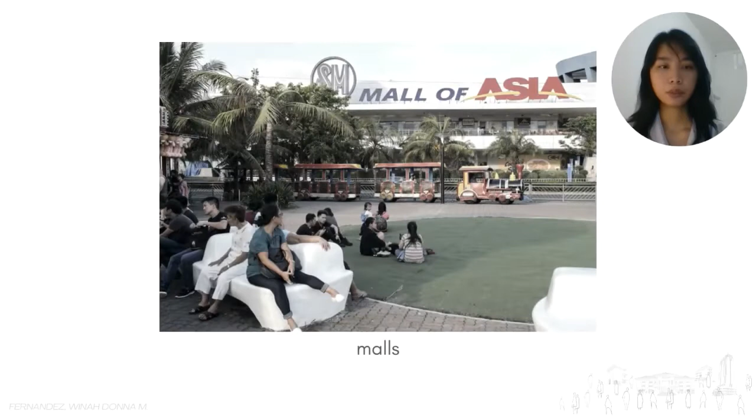However, in the present Philippines, various malls, which are all privately owned, have evolved into major gathering places, the new civic centers, which obscurely become what is public life, a place of interaction in air-conditioned containers of consumerism.

So what are civic centers? A civic center is a cluster of buildings and spaces, such as parks and government buildings, that offers necessary services to a city or municipality.

It provides the community a place for recreation and the government body a facility to effectively carry out its obligations in promoting the welfare of the community.

The proposal is to develop a civic center for the municipality, which would contain spaces for a learning center, public library, local government offices, community park, a co-working space, and a flexible exhibition and lecture hall.

The purpose of this study is for the community civic center and park to serve as a flood prevention facility, as well as a space for recreational activities and government services, boosting the productivity of the community.

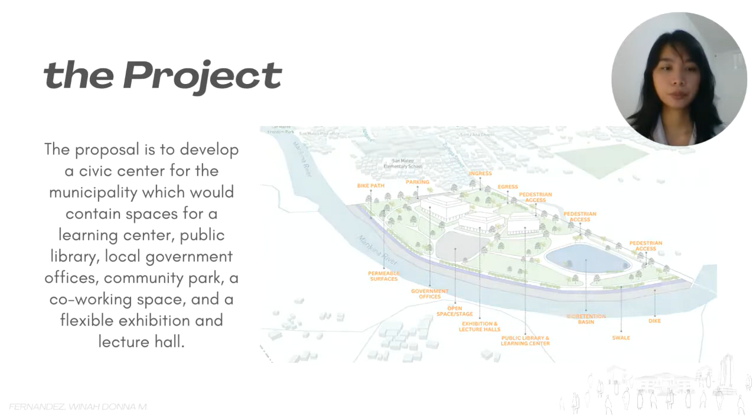The client for this project would be the local government unit of San Mateo, Rizal. The proposed project would cater to the residents of San Mateo, Rizal, hence the municipality is chosen as the main client. The allocated fundings for this project may be minimal, thus the project will be a progressive development.

It will be a master plan of a community civic center and park divided into different phases that can be carried out through different government administrations to ensure the development of this project.

But why San Mateo? San Mateo is a municipality that is still growing. It is bypassed by the Marikina River and the unbuilt land along the riverside is an ideal place for improvement.

Problem statement. The municipality of San Mateo lacks community-centered facilities such as public parks, public libraries, and green spaces. These spaces make the place and community more alive and interactive.

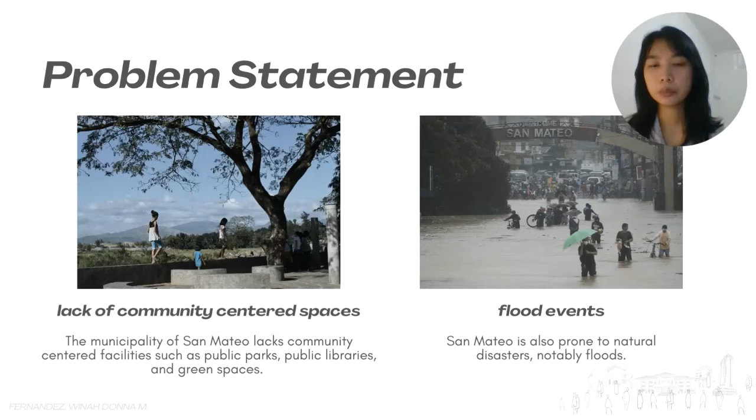San Mateo is also prone to natural disasters, notably floods, according to the flood hazard map. The municipality has a lower elevation than Rodriguez, its neighboring municipality. Thus, it becomes the catchment area during flood events.

The primary goal is to create a place for the community and produce a long-term solution with the help of architecture for the flooding problems that the municipality encounters every time there is heavy rain. It may not be completely eradicated, but it is aimed to lessen the effects and casualties.

The following are some of the objectives that should be attained. Develop the most efficient quality design plan that will combine community civic center and flood prevention system.

Integrate flood control systems, provide additional job opportunities, create a place for people, promote efficient utilization of infrastructure and lands.

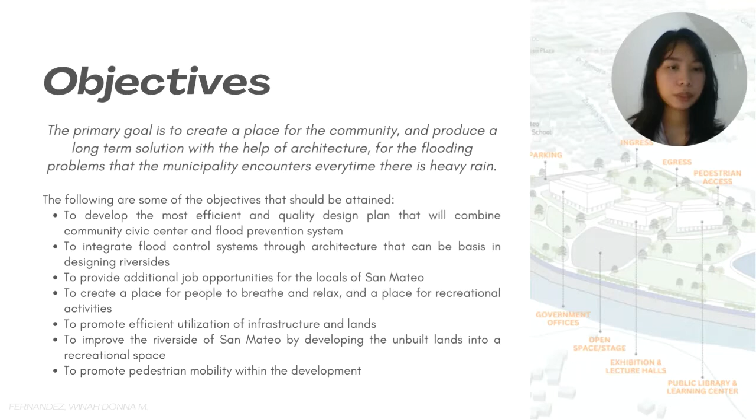Improve the riverside of San Mateo by developing the unbuilt lands into a recreational space, and promote pedestrian mobility within the development. Project scope and limitations.

The project offers and provides San Mateo a development introducing convenience to the workers and community of San Mateo, Rizal, improves the standard of living in the community, and strengthens the community's sense of identity.

The project will consist of a learning center, public library, local government offices, community park, and a flexible exhibition and lecture hall.

The design and plan of the dike will be spearheaded by the DPWH and will only be incorporated into the proposed civic center's design and plan.

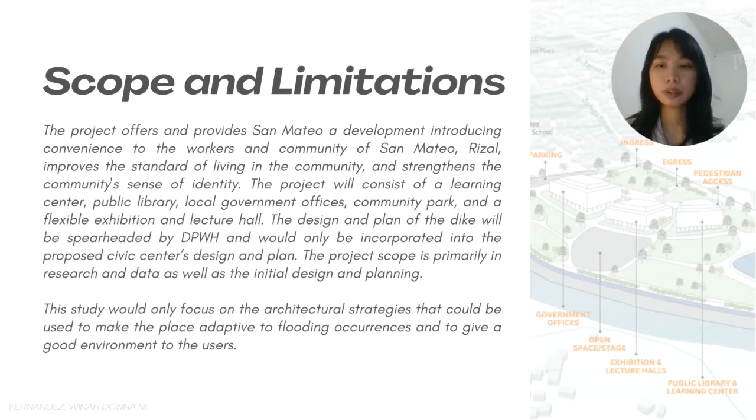The study will only focus on the architectural strategies that could be used to make the place adaptive to flooding occurrences and to give a good environment to the users. Here is the design process followed by the proponent.

First is identifying the project, its problem and objectives, followed by gathering and analyzing of data. The data gathered will support the initial problem and objectives identified. Next is evaluating the site, and after that is coming up with the initial schematic plan.

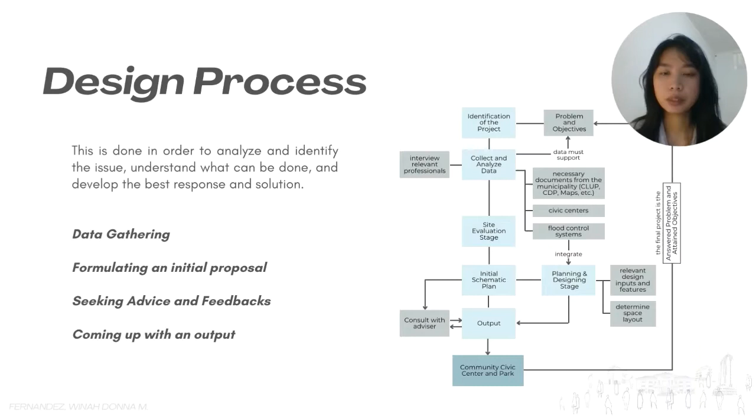The outputs are consulted with the advisor and revisions are applied if necessary. The final output is the proposed community civic center and park, which answers the problem and the objectives.

For this design project, its title in English is Sama-Sama, connecting together the community, architecture, and environment of San Mateo Rizal. The site.

There are three proposed sites for this project. First is located in Santa Ana, San Mateo Rizal, measuring approximately 2.6 hectares. Next is in Patiis, San Mateo Rizal, measuring approximately 4.2 hectares.

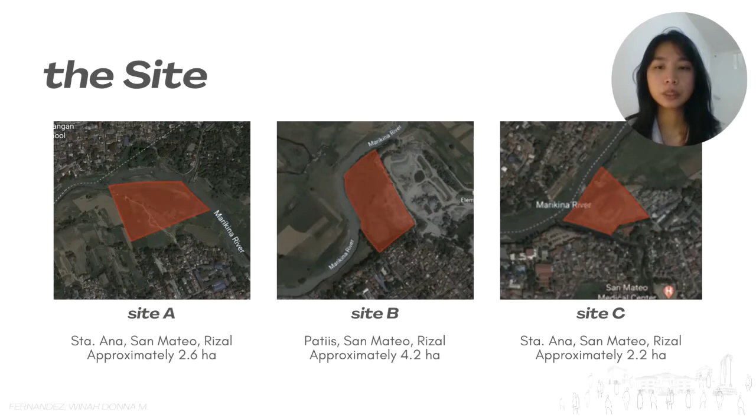The third site is also in Santa Ana, San Mateo, Rizal, measuring approximately 2.2 hectares. After the site selection process, it was determined that Site A is the most suitable site for the project.

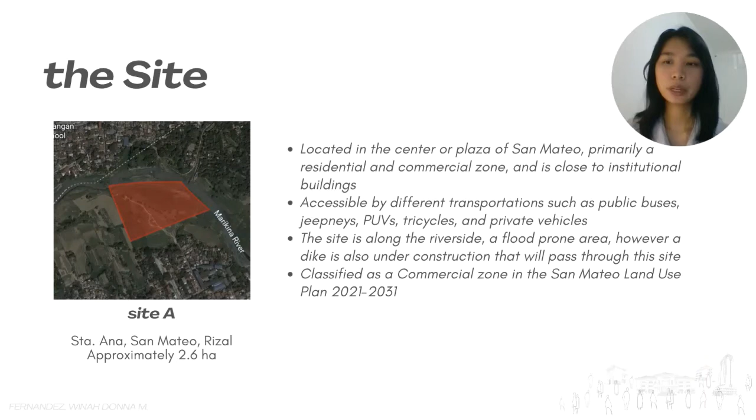The site is privately owned and classified as a commercial zone in the San Mateo Land Use Plan. Its location is in the center or plaza of San Mateo, primarily a residential and commercial zone, and is close to institutional buildings. Most commercial establishments are fast food restaurants, supermarkets, public markets, and hardware stores, while nearby institutional buildings include the municipal hall, schools, trial court, and fire station.

It is accessible by different modes of transportation such as public buses, jeepneys, PUVs, tricycles, and private vehicles.

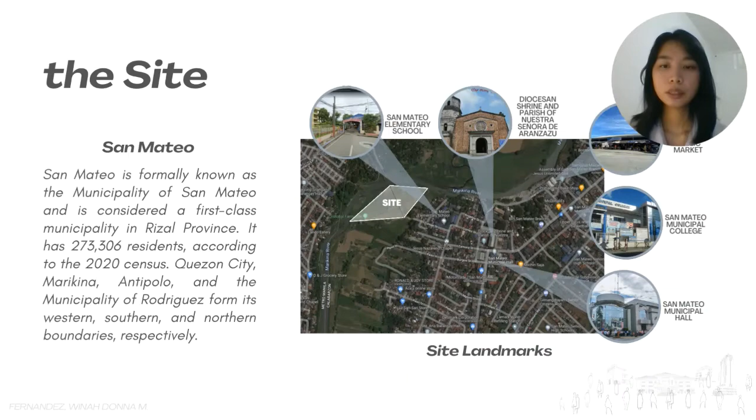San Mateo is formally known as the Municipality of San Mateo and is considered a first-class municipality in Rizal Province. It has 273,306 residents according to the 2020 census. Quezon City, Marikina, Antipolo, and the municipality of Rodriguez form its western, southern, and northern boundaries respectively. The town of San Mateo is located approximately 11 kilometers from Pasig and 24 kilometers from Manila. It is composed of 15 barangays and its total land area is approximately

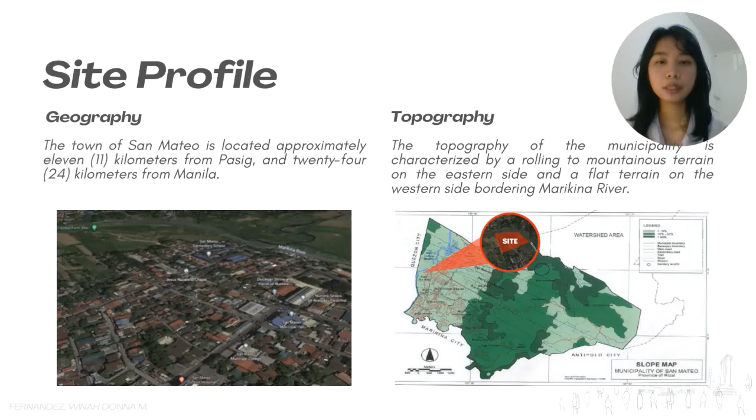8,788.98 hectares. The topography of the municipality is characterized by rolling to mountainous terrain on the eastern side and flat terrain on the western side bordering the Marikina River. The location of the proposed development is within the majority of the municipality's relatively flat areas, below 18% slope.

Flood susceptibility: the holding capacity of the upland and lowland areas in San Mateo is continuing to decline as a result of the city's fast expansion, which significantly contributes to water runoff.

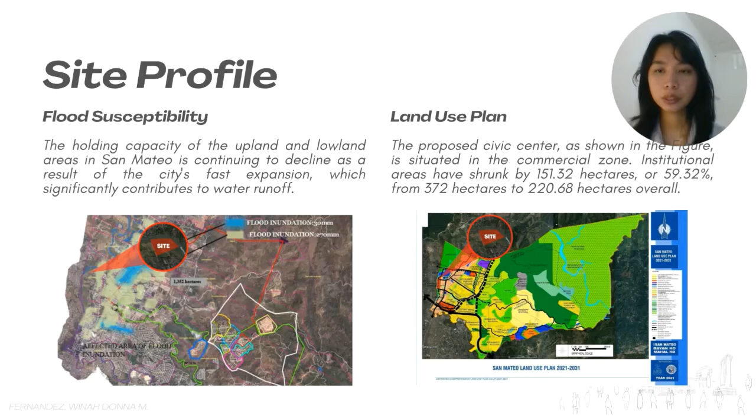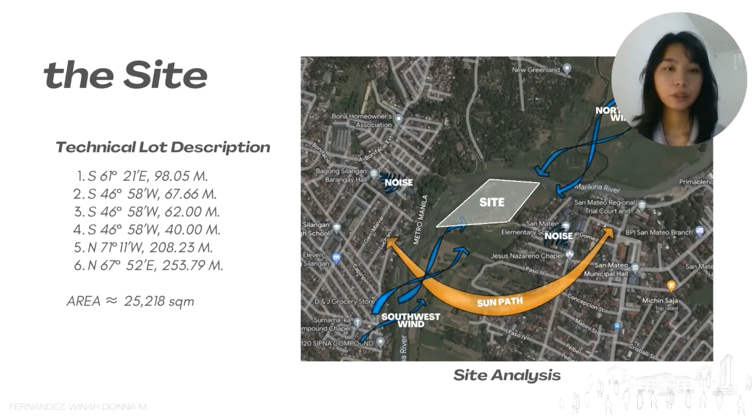Land use plan: the proposed civic center, as shown in the picture, is situated in the commercial zone. Shown here is the site analysis and the technical description. The total area is 25,218 square meters.

SWOT analysis. Strengths: the site is within the center of San Mateo and is accessible by all users. The site has an ample lot size to accommodate the project and is in proximity to other institutional facilities.

Weaknesses: the site is prone to hazards like seismic activities and flooding, and there is also no proper sidewalk in the neighborhood. There are also squatters and informal settlement issues.

Opportunities: the project will provide more job opportunities and will cater to the community with a place to relax and do activities. The project will be along the ongoing dike project, meaning there will be another road access. Threats: the site is located at a commercial center, so possible competition can be found.

Here are the development controls, computed in accordance with the National Building Code.

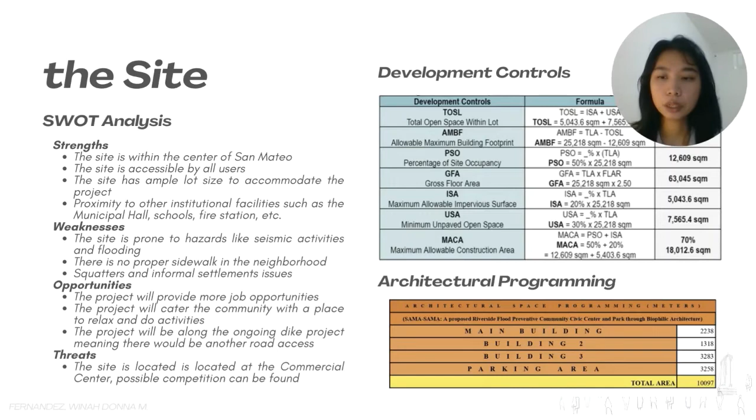For the architectural programming, the total area completed is 10,097 square meters, which would account for the main building, buildings 2 and 3, and the parking.

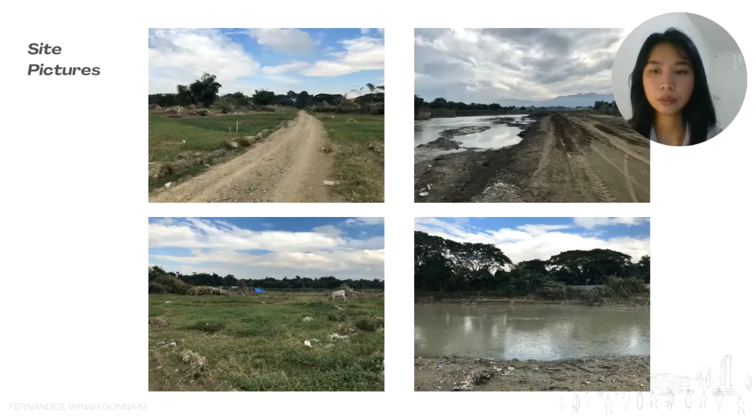Here are the site pictures. The following images show the current conditions of the site. It can be seen that the site is used for agricultural purposes, hence the relatively flat area with only vegetation. The existing road within the site is still unpaved and needs more development. In addition to being right beside the river, it also has a view of the mountain, which can provide an aesthetic view for the proposed civic center and park.

The following are the case studies. The Quezon City Hall complex is a continuous expansion taking place across two different administrations. For the proposed civic center, it will also consist of various institutional spaces similar to the Quezon City Hall complex. It will also be a phase-by-phase project carried out through different administrations in order to stay within the budget allocated by the client.

Next, we have SM City Marikina, an establishment located within the Marikina River watershed, making it extremely flood-prone. In 2009, when Typhoon Ondoy hit the city, the structure was able to withstand the flood thanks to its structural system. The mall sits on top of 246 circular stilts, elevating the main mall area to 20.5 meters. The proposed community civic center and park is also situated along the Marikina River, making it a similar case to SM Marikina.

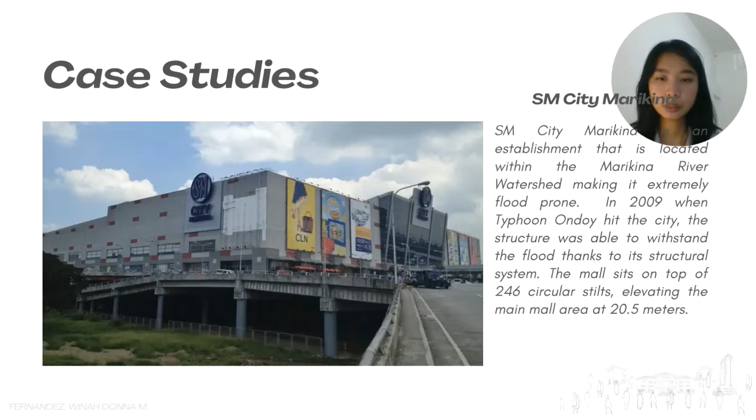For this proposed development, the proponent will implement the same stilt system of SM Marikina. The buildings will be elevated from stilts, and all spaces on the ground floor will be open to allow water to flow in case of flood events. These open spaces will also serve as a parking area for the users of the facilities.

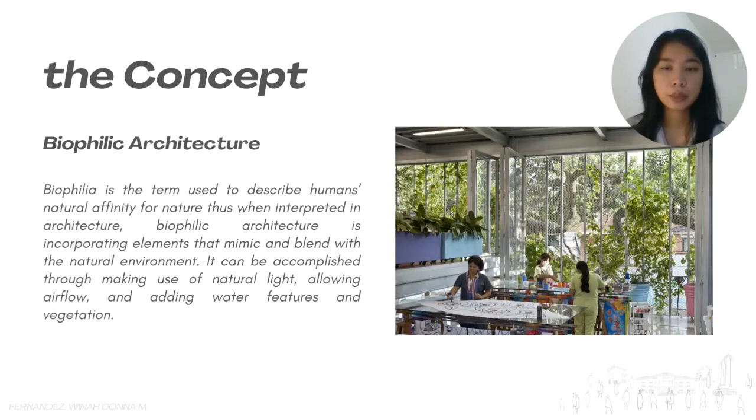The concept: how do we connect the community and environment together? For this project, the concept of biophilic architecture will be applied. Biophilia is the term used to describe humans' natural affinity for nature. Thus, when interpreted in architecture, biophilic architecture is incorporating elements that mimic and blend with the natural environment.

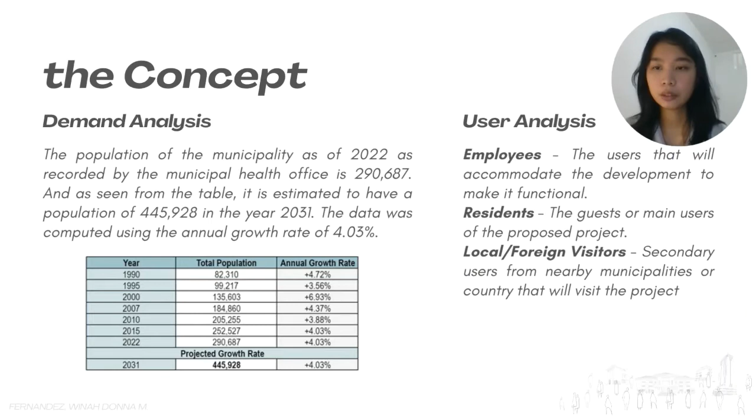Next, we have the community and architecture. The community are the primary users for this project, thus the demand analysis and user analysis were identified. The population of the municipality as of 2022 is 290,687, and as seen from this table, it is estimated to have a population of 445,928 in the year 2031. The data was computed using the annual growth rate of 4.03%. For the user analysis, we have three users: the employees, residents, and local or foreign visitors.

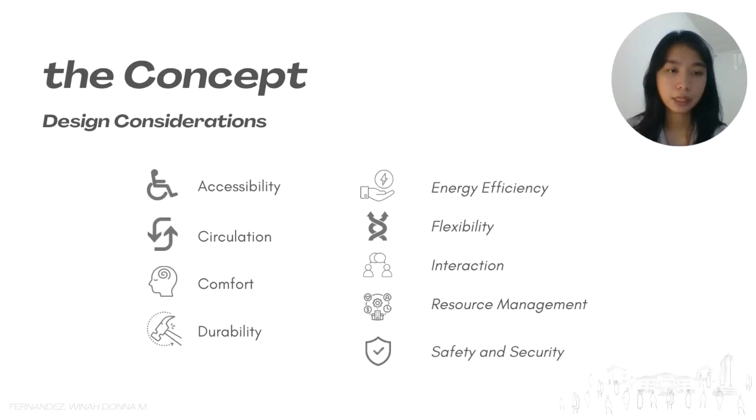There are also design considerations that will help the community connect more with nature: accessibility, circulation, comfort, durability, energy efficiency, flexibility, interaction, resource management, and safety and security.

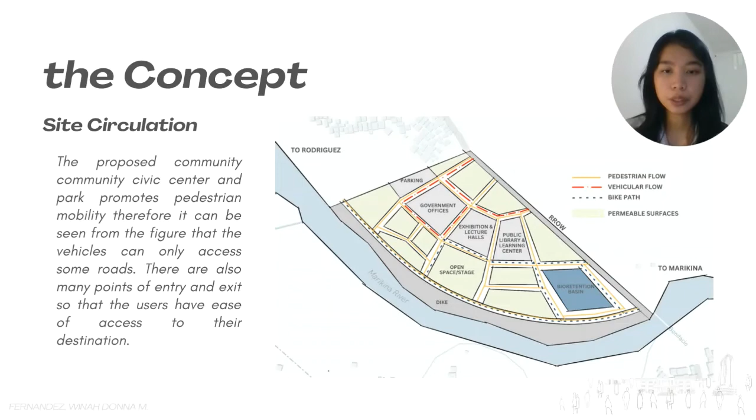Site circulation: the development promotes pedestrian mobility, therefore it can be seen from the figure that vehicles can only access some roads. There are also many points of entry and exit so that users have ease of access to their destination. And lastly, connecting environment and architecture together.

This project will follow the design philosophy of Tadao Ando: we borrow from nature the space upon which we build. This design philosophy, aligned with the proposed civic center's design concept, intends the development to be an experience of nature through architecture.

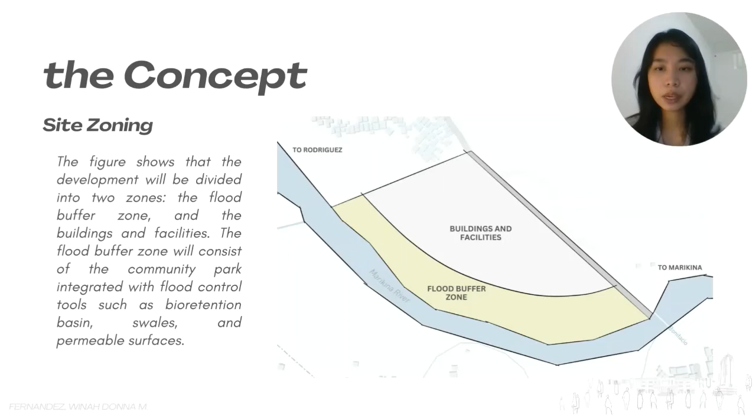As mentioned earlier, one of the objectives is addressing the flood events in San Mateo, Rizal. Therefore, the site will be zoned into the flood buffer zone and the area for buildings and facilities. The design: the proposed civic center will consist of three buildings distinguished by its purpose. There are also many intersections that will serve as meeting points where the diversity of individuals can interact.

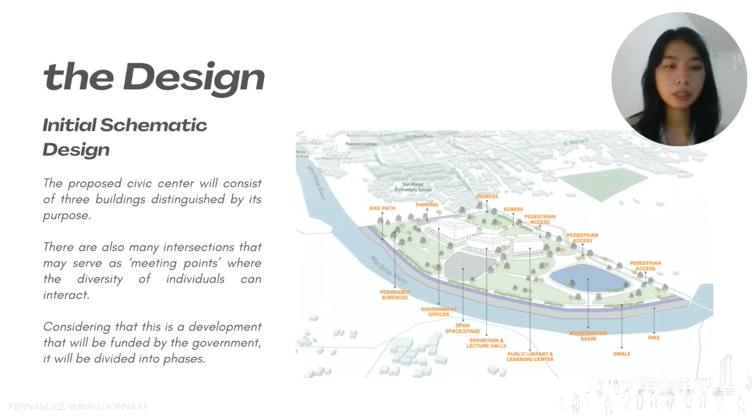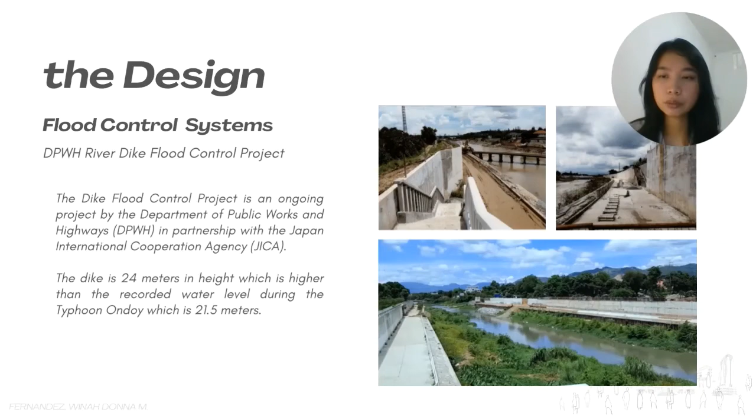Considering that this is a development that will be funded by the government, it will be divided into phases. The first phase will be the community park, integrated with flood control systems such as the aforementioned dike. This dike is a project by DPWH in partnership with the Japan International Cooperation Agency. The dike is 24 meters in height, which is higher than the recorded water level during Typhoon Ondoy, which is 21.5 meters. It will be built on the Riverside site.

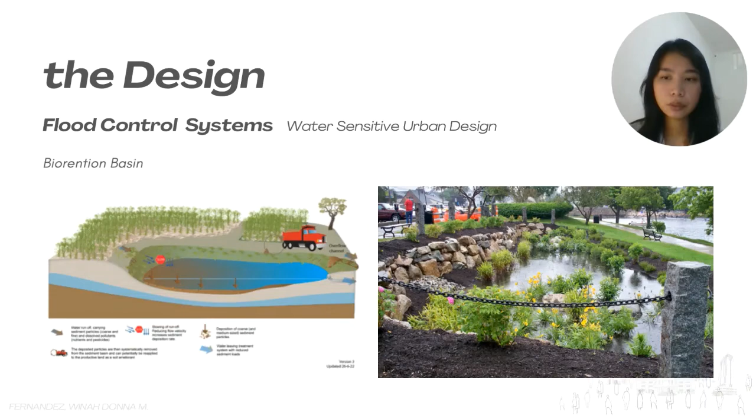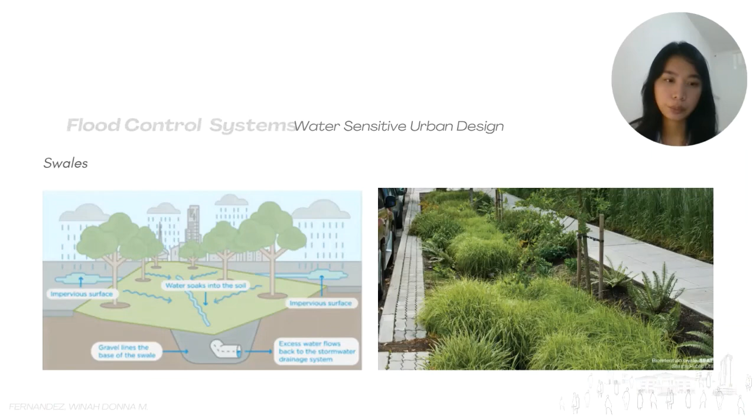A bioretention basin will also be placed at the lowest point of the site so that it retains the stormwater runoff and reduces the flood flow. Swales will also be utilized on the roadsides, which not only filter the stormwater but also enhance the landscaping as well as the wetlands. The second phase will be the construction of the main building, which will contain the government offices.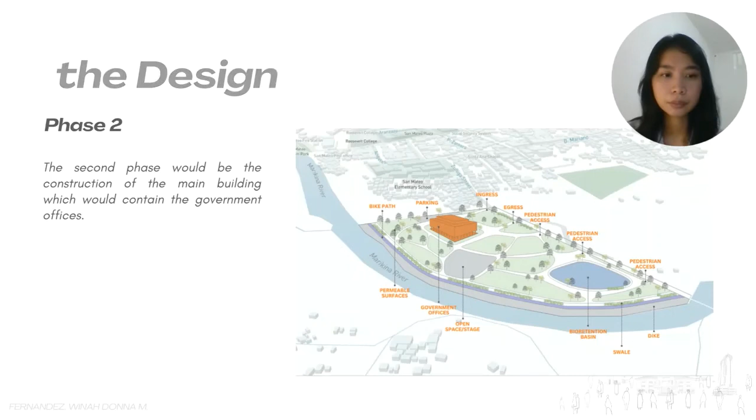The third phase will be the building containing the public library and learning center. And the fourth and final phase of this development is the construction of the building containing the flexible exhibition and lecture halls.

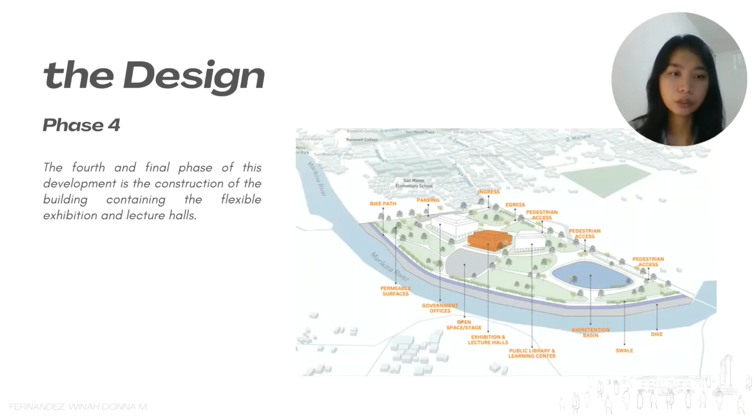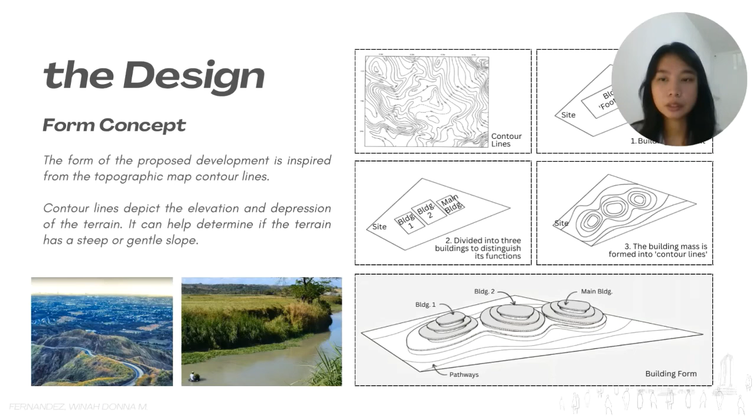The form of the proposed development is inspired by the topographic map contour lines. Therefore, the development will mimic the contour lines of the mountain and river in San Mateo, Rizal, in order to blend with the surroundings. For the material concept, we have double glass cast, aluminum cladding, and wood.

For the innovations, we have the kinetic floor tiles. These tiles generate electrical energy through steps, and the energy collected can be stored or used to power devices. Next, we have eco-concrete, made from local and recycled materials such as waste glass, fly ash, and pozzolanic materials. Then, the zero-energy terracotta air conditioner, an air cooling system that uses the principles of evaporative cooling, an ancient technique of lowering temperatures with the use of water and local materials.

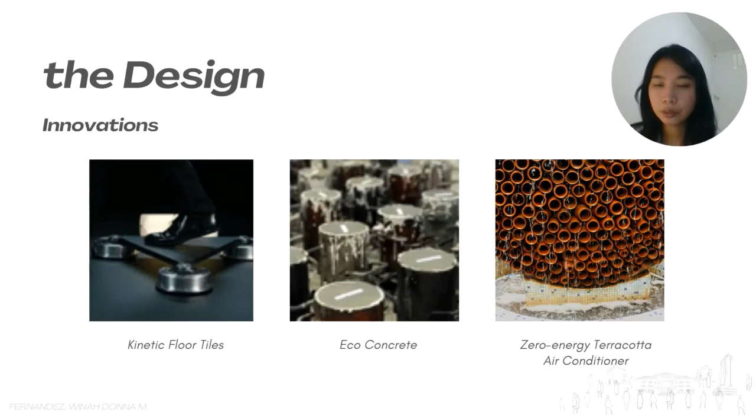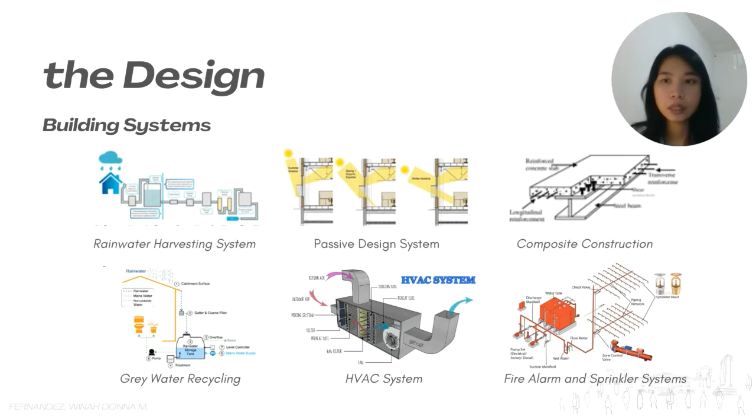Next, we have building systems such as rainwater harvesting system, passive design system, composite construction, grey water recycling, HVAC system, and fire alarm and sprinkler systems that will be utilized in the development.

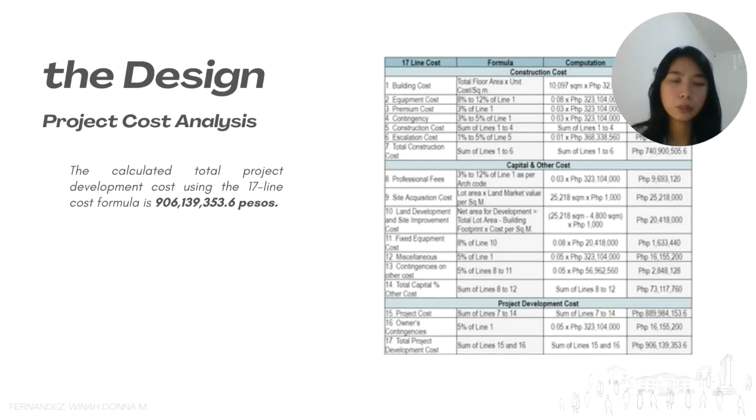Finally, we have the project cost analysis. The calculated total project development cost using the 17-line cost formula is 906,139,353.6 pesos. All these design inputs will help the proposed community civic center and park be a place where community, environment, and architecture are united together.

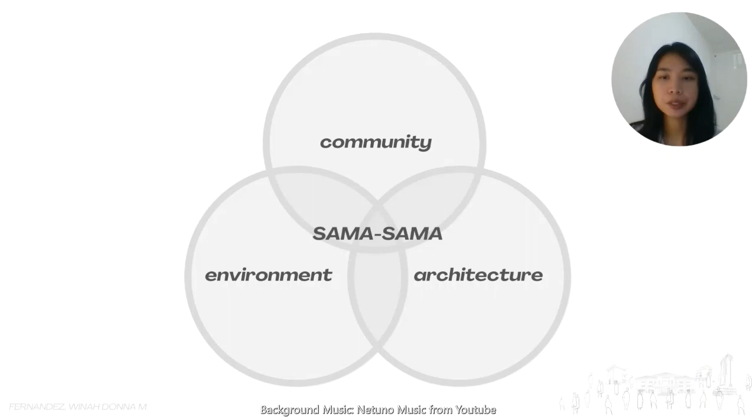Civic centers must be provided in the municipalities as these help contribute to the growth of educated, intelligent, and valuable members of the community.